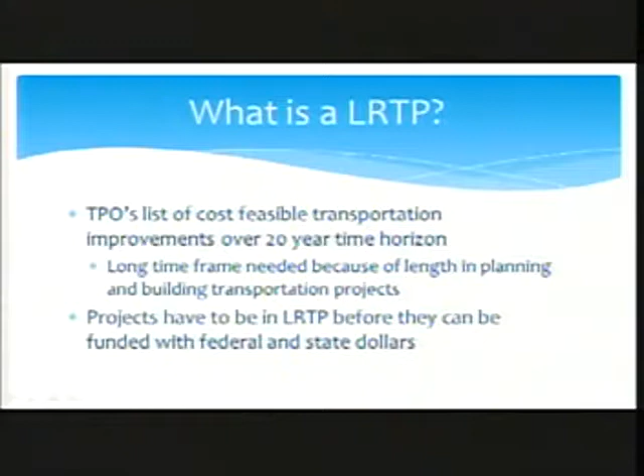Our long-range transportation plan is our TPO's cost-feasible projects out to 20 years in the future. All of the projects have to be included in the long-range transportation plan in order to receive any federal or state funding in the future. So all the projects you heard about earlier, they all had to be started and included in this plan at least 20 years ago for most of them. So it's been a long time in the process. And due to a variety of changing factors, we have to update this plan every 5 years.

We don't have a crystal ball and things change as the economy changes. So each update we have to take a look at land use plans, population forecasts, update those, look at revenue forecasts. We all know that cars are more fuel efficient and that the gas tax isn't really getting us as far as it used to. Actually at our TAC meeting on Monday, they sparked some good discussion about maybe exploring some ideas about new revenue sources as part of this long-range plan update. So that's something we're going to keep in mind moving forward.

Another thing that we take a look at is any new needs that have come up. We look at everybody's existing transportation plans. We meet with all of your local staff to see what's in your comprehensive plans, and all of the modal agencies, what's in their master plans at the port and the airport, just to make sure we're all on the same page and we know what everyone's looking to do in the future. Another fun thing that we get to address in this update is performance measures that are required by the FAST Act and MAP 21. We have to make sure all of those are addressed, and we have to make sure our long-range plan is adopted in October of 2020.

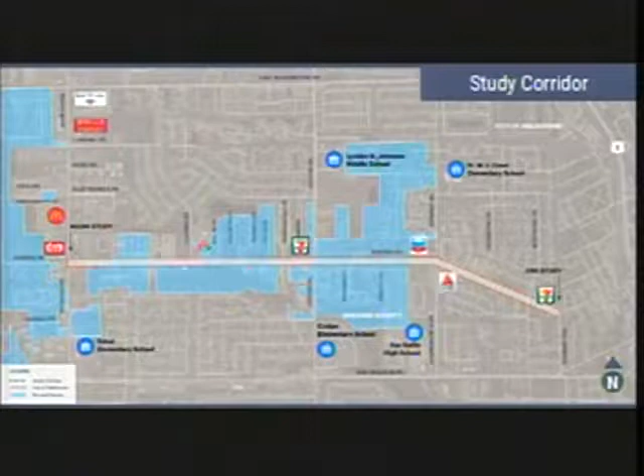So what I'll do is go through these initial slides pretty quickly, get towards the meat, which is at the end of the presentation. Purpose of the study: first phase in the transportation development process, we're really trying to address safety, operational, and transit issues along Aurora Road. We are down in Melbourne. Part of this is also Brevard County, from Wickham Road east to Stewart Avenue, which is one signal past Stewart Road / Commodore Boulevard.

So not to get those confused, we're going one signal past that to the east. Highlight of public involvement: we had a project advisory team - TPO, FDOT, Brevard County, City of Melbourne, and Space Coast Area Transit - a pretty comprehensive group. We held 3 public meetings, 120 total attendees. We also got some hits on our project website as well. People responded to comments about the project.

We had 2 unique aspects of our public meetings. We had a 'create your own typical section' station during our second public meeting, which actually got people to look at the roadway typical section and say, I have 63 feet of right-of-way, what can I fit in there? And they were able to see that if you add travel lanes or take away different elements of what's out there today and add some bike lanes, how that affects the right-of-way within the typical section.

We also had a 3D roadway alternatives section where we were able to put on virtual reality glasses and see, okay, if you were standing out there with the improvements that we had, here's what it would look like. So we have some of those 3D graphics here at the end as well.

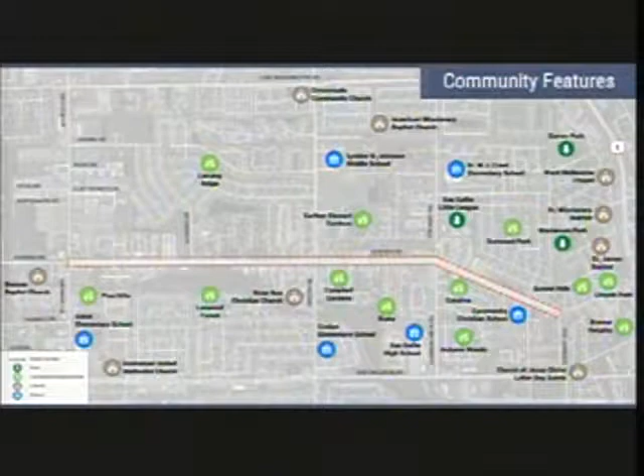Highlight of existing conditions, a bunch of community features. So you got a lot of neighborhoods, a lot of residential, 5 different public schools, and then a private school along the corridor, so that'll play a factor in the ped bike traffic that we were seeing. With that being said, we were lacking pedestrian facilities, and we have no bicycle facilities out there today. We have a 4-lane undivided roadway, edge of pavement to edge of pavement, and then we are missing areas of sidewalk.

So anywhere where you see blue, that's where sidewalk is. Where you do not have it, that's a large majority of the north side. What you'll see is that picture of that drainage ditch. You have a lot of those ditches on the north side, which is the reason why you do not have sidewalks on that north side.

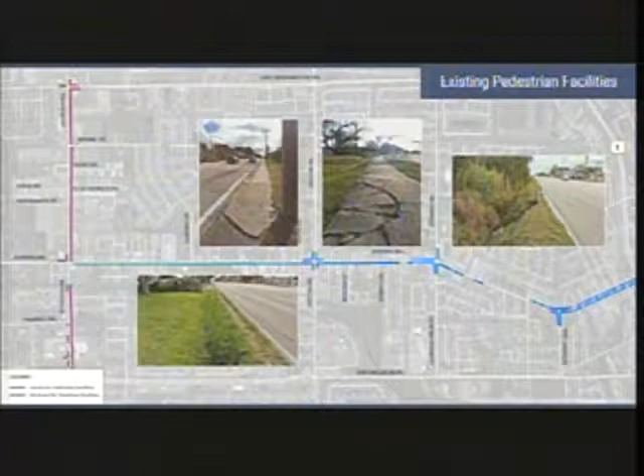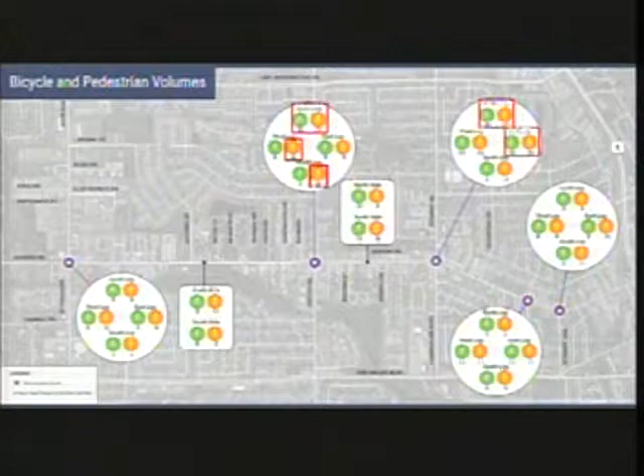A little bit on the ped bike count. We went out and did ped bike counts along the corridor. This is the peak 4 hours in the afternoon. What we wanted to highlight is Croton and Commodore. You'll see that you have those really high volumes, east, west, north, south. Those are a lot of the school kids, either the high school or the elementary and middle schools, walking along or crossing Aurora. So it's a big deal along this corridor.

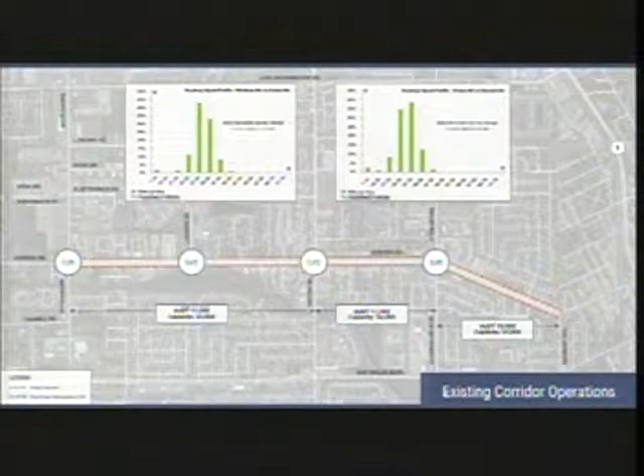High-level operations, our capacity - the biggest numbers you want to see here are that AADT, the traffic along the roadway today, is about 10,000 to 11,000 vehicles a day. Our capacity is somewhere in the mid to upper 30,000s. So what we're seeing is we're about a third to a quarter of the capacity for the 4-lane roadway that we have out there today. The graphs above just show that our average travel speed is within the range, kind of that 35 to 45 mile an hour range. Not a lot of speeding issues that we saw out there.

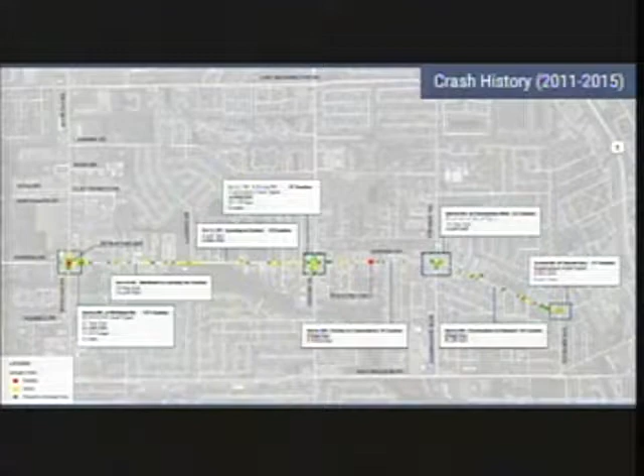Also looked at crashes. What you'll see is the clusters of crashes happen around the intersections, the signalized intersections. I think we had almost 140 at Wickham Road - that was our high crash location. We had about 50 at Croton, and then around 25 at Commodore and Stewart. We did have a bicycle fatal crash between Croton and Commodore. What we did see was that of our ped and bike crashes, a large majority were bicycle.

You can correlate that, if you want, to the fact that there are no bike lanes out there. So either the bikes are riding on the sidewalk where vehicles aren't expecting them to be, or they're riding in the road, or they're trying to cross the road. So there's quite a few issues out there with the lack of pedestrian and bicycle facilities.

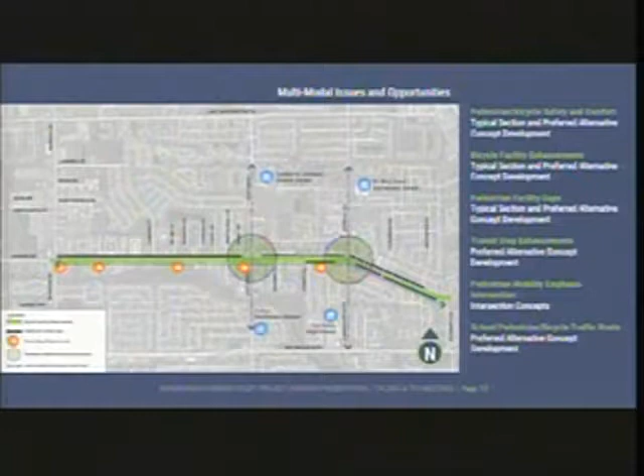Leading me into the issues and opportunities. We broke this down into multimodal - that's ped, bike, transit - and then vehicular and drainage, which I'll talk about in a second. The main multimodal issue was the pedestrian and bicycle level of safety and comfort. We wanted to facilitate those bicycle needs by trying to add bike facilities, add that sidewalk on the north side where we were missing it, and enhance that sidewalk on the south side while also enhancing transit stops along the corridor.

On the vehicular side, all those little blue water dots that you see are all the locations where we had pretty significant drainage swales on that north side, which directly correlates to where that sidewalk is not constructed on the north side as well. So those are some of the issues we were having. We also had some high crash, left turn crash emphasis areas, and we wanted to highlight the intersections for those angle and left turn crashes.

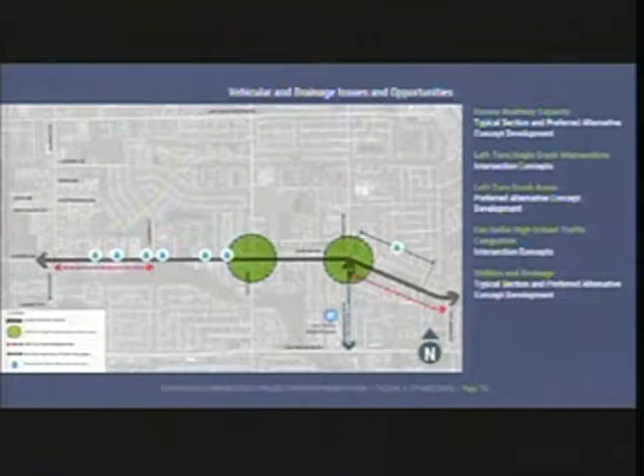So future conditions analysis. Before we got in and started exploring ways to make this a more complete streets friendly corridor, we wanted to take a look at future no build. So this is if you kept the lanes out there today, the 4-lane roadway, kept all the intersections the same - what you're seeing is that AADT and that capacity are still relatively low. I think we were looking at about a 0.5% growth rate along the corridor just because it's largely built out. This whole entire area is largely built out, so we're not going to see a whole lot of traffic growth in the future. And the levels of service were all C or B at the intersections as well, which is good.

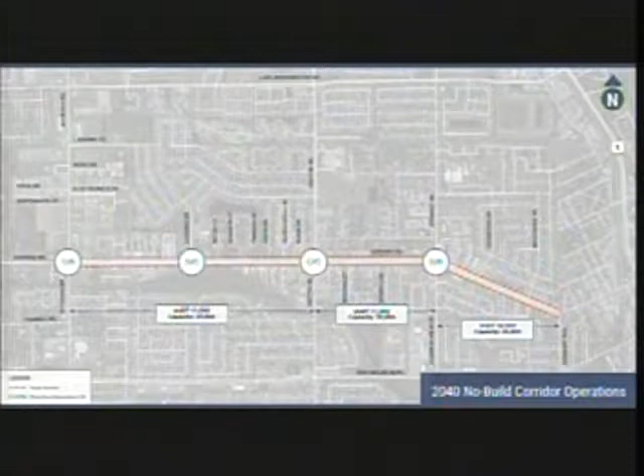In terms of the future build alternatives, at a high level, we were trying to create a complete street along Aurora Road. Everybody knows what a complete street is. It enhances all the multimodal features, allowing adequate ped and bike facilities, and transit users, while also accommodating vehicles, maintaining a balance between all those modes.

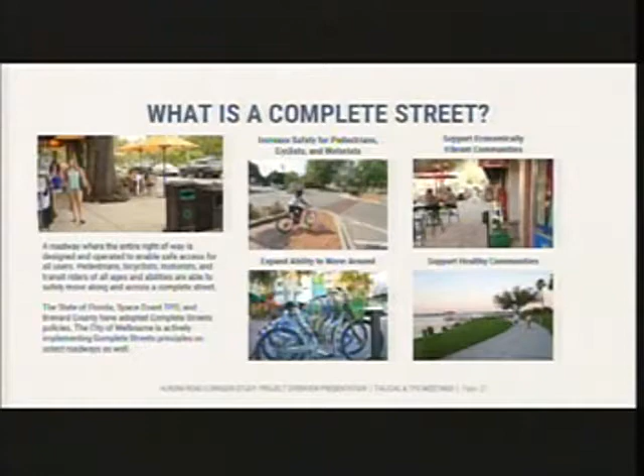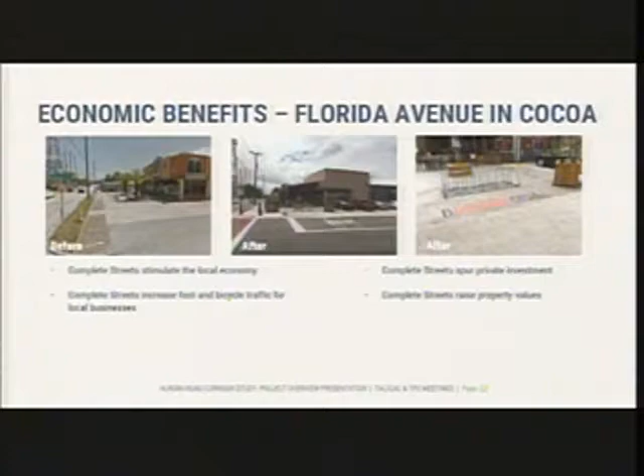We see some of the economic benefits of complete streets. This was a project recently completed along Florida Avenue in Cocoa. Before, we had a couple of businesses there that were then redeveloped, either because of the Complete Streets project or shortly after it.

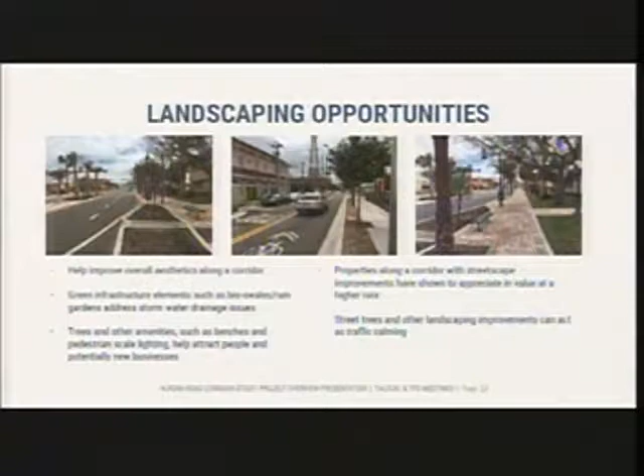We also have landscaping opportunities as well. Landscaping wasn't as ideal here, it wasn't something that was really discussed much. Some residents said they didn't really want the landscaping, and that was fine. We're not necessarily recommending this, but it's a kind of byproduct of the complete streets methodology as well.

One of the ways you can do a complete streets project and facilitate those modes, which we explored along Aurora Road, is a lane elimination, or a road diet, as we like to call it. Lane elimination has a pretty bad connotation - when you tell people you're going to take away their lanes, you tend to get a negative reaction. So we like to call it a road diet, but essentially they're the same thing.

The most common type is going from a 4-lane undivided section, which is what we have along Aurora Road, to a 3-lane divided section. You'll see those graphics in the lower left: you have the 4-lane undivided, and you go to the 3-lane with a center two-way left turn lane.

For safety, we ran a Highway Safety Manual analysis on this corridor, so these are real numbers for Aurora Road. We'd see a crash reduction of about 20 to 30% on the corridor, which equates to about $5 to $7.5 million saved over a 20-year life cycle of the project. Keep that in mind as we start talking about project costs.

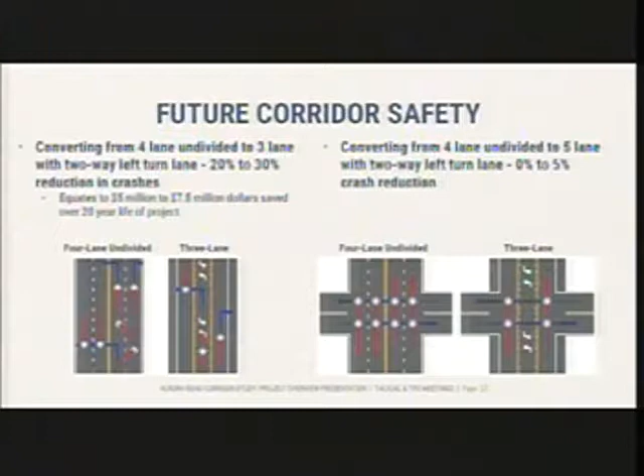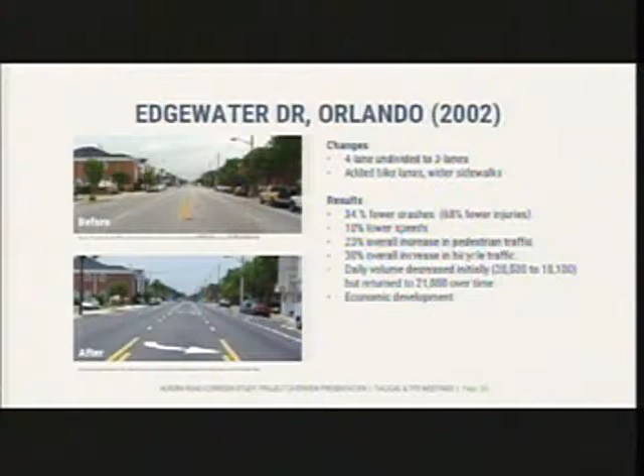A case study we looked at, there are a couple more outlined in the report, but this one was pretty applicable: Edgewater Drive in Orlando, for those familiar with it. We had about 34% fewer crashes, 10% lower speeds, an increase in ped bike activity, and traffic volume, which I wanted to point out, is about double what it is along Aurora Road. I drive this corridor pretty often, I work in Orlando, my bank is along this corridor, and it works well from a 3-lane perspective. You also get that increased economic benefit as well.

Here's a graphic to show how this works. Today along Aurora Road, if you come up to, say, Lansing Street, you have the situation above where the yellow cars are coming up to the intersection along Aurora trying to make a left to go north onto Lansing Street. You also have the gray vehicles that may get caught in that inside lane and have to swerve over, maybe cut somebody off, causing a collision to get out of the way, either so they don't rear-end somebody or because they want to get around them.

What you see is that if you go to a 3-lane typical section at that location, you can actually develop a left turn lane there. Just think of Aurora with one travel lane in each direction, and an exclusive left turn lane from Aurora Road to go northbound onto Lansing Street.

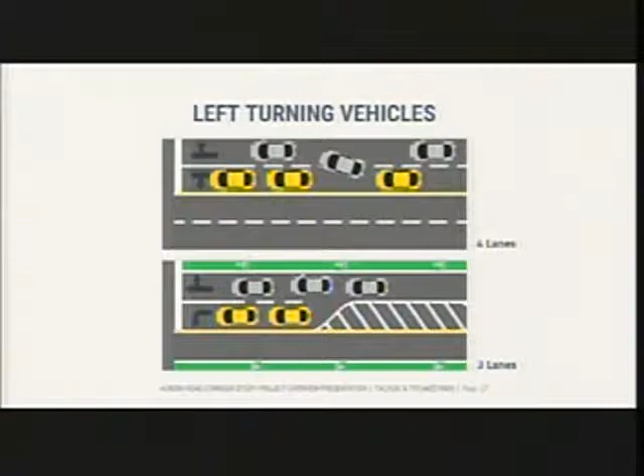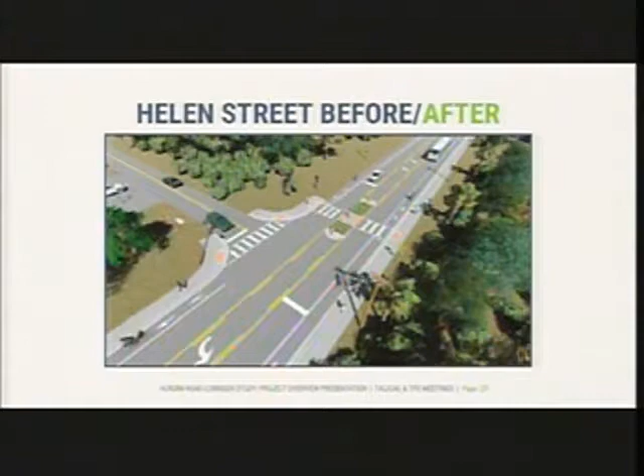What I did want to show is Helen Street. This was one of our 3D typical sections that we did, and this ties with a bus stop that's right where that mid-block crossing is.

You could see that if you go from the 4-lane undivided, you add those sidewalks on the north side, you connect down to the bus stop, wider sidewalk, and those bicycle lanes as well. So then a little bit on Commodore as well. The before and after, 4 lanes along Aurora, you could come through and do the bicycle lanes. We were able to add a right turn lane to go south on Commodore to accommodate that AM high school traffic as well. We were also seeing some queuing northbound, so we were able to add a northbound left there as well. So some pretty significant changes to the Commodore intersection, but you're able to make it work with that road diet concept as well.

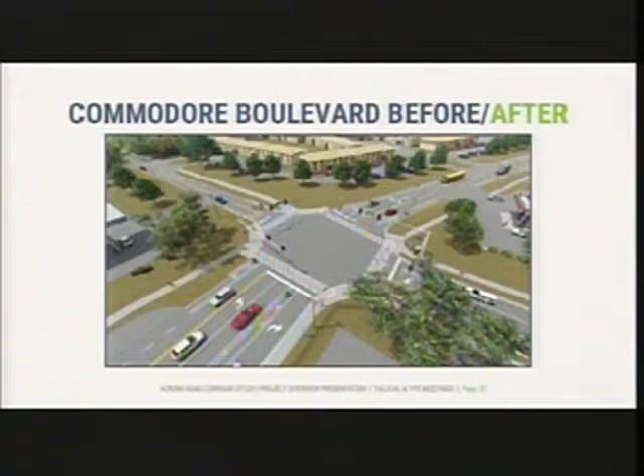So a little bit on the roadway improvements. I'll go through these pretty quick to get to the matrix, but we looked at 6 different options overall. The first 2 dealt with adding a center 2-way left turn lane to the 4-lane section that's out there today. As you would expect, it incurs quite a bit more right-of-way if you're trying to do that type of improvement. This came out from our first public meeting where we had folks come out and say, we don't want you to do a road diet, we want you to put in a center 2-way left turn lane. So we went through and explored that concept to see what the impacts would be.

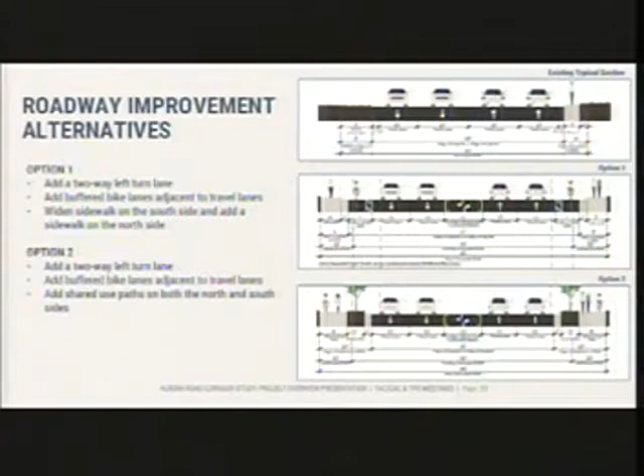Options 3 and 4 are your more short-term alternatives. We were looking at essentially resurfacing the roadway, doing that road diet concept for options 3 and 4, putting in the center 2-way left turn lane, 1 travel lane each direction. You're able to have bike facilities and then improve the sidewalks as well. Then 5 and 6 is more of the same, just positioning your ped and bike facilities in different places along the roadway. Option 5's distinct difference is that we're able to maintain those swales on the north side of the road, and you put the shared use path on the back side near the right-of-way line.

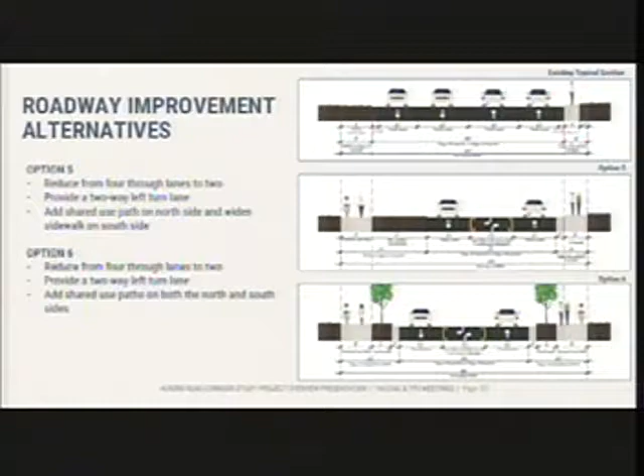So what does this all mean? We went through and did our qualitative assessment. This really isn't putting numbers to anything, it's just more high-level impacts. What we saw is that generally all the alternatives improved ped or bike safety in some way. Even the 5-lane alternatives, you would go through and add bike facilities and sidewalks to that, so you would see an improvement in bicycle mobility and safety. What we did see is that as you went down to the road diet, you would see that adverse effect slightly in the vehicular mobility, so you are taking away a travel lane in each direction. We recognize that there would be a slight impact to operations at that point.

But when you get into the overall cost of the improvements, you see at that 5-lane alternative, if you kept the 4 lanes out there and added the center 2-way left turn lane, it's by far and above the most cost from a right-of-way, drainage, utility, and overall cost perspective. So the 3-lane options were looking pretty good.

So what we ended up coming out with was a long-term vision to do a road diet along this corridor. What essentially happened was between the second and third public meetings, we took a 3-lane concept to the second public meeting and there was support for it. We had about 90% of people say, hey, we like this concept, we want to see it move forward. We came to our third public meeting, fleshed that concept out a little bit more, and we had about 90% of the people say that they did not want a road diet concept. So it was a very stark difference between the second and third public meetings.

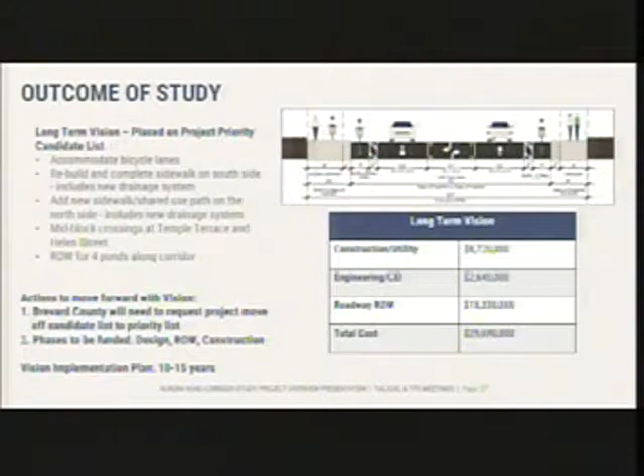So what ended up happening is the county is going to move forward with a resurfacing project. They're going to resurface it as the 4-lane road that's out there today. What we did want to propose is a long-term vision for the corridor, which is slightly more money, in the $30 million range, and a large majority of that is because of the improvements we'd be making to that north side. We'd be adding that shared use path, filling in the drainage ditch, piping it for lack of a better term, and then you would have to buy off-site ponds, which is where that $18 million in right-of-way comes from. So we're not acquiring property along the corridor, we're acquiring pond locations potentially to treat all that water.

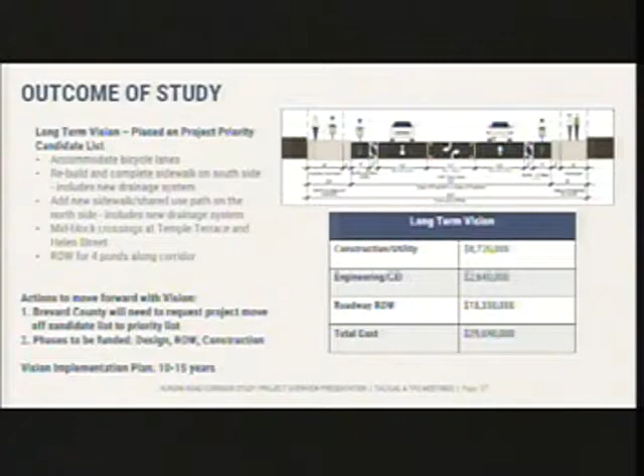So the action items on this vision: Brevard County will need to request the project move off the candidate list and onto the priority list. We still have design, right-of-way, and construction phases that need to be funded. We're looking at about 10 to 15 years to implement the long-term vision.

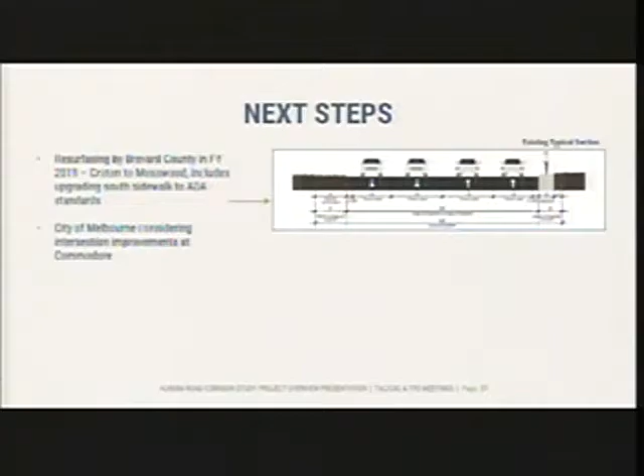As mentioned on the next steps, Brevard County is going to resurface the roadway from Croton to Mosswood, including south side sidewalk ADA upgrades. The City of Melbourne is also considering intersection improvements at Commodore. We also looked at some short-term improvements, including the resurfacing, emphasizing the intersections, and putting special emphasis crosswalk markings when doing that resurfacing project.

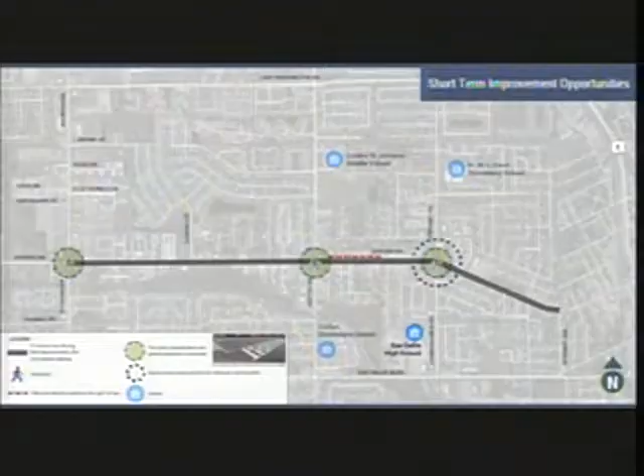A few projects came out of the Wickham Road operational analysis that tie into the Aurora Road project. At the intersection of Wickham Road and Aurora, we're looking at doing a short-term project, about $200,000, to add curb ramps on all four corners, upgrade our crosswalk markings, and connect back to the bus stops.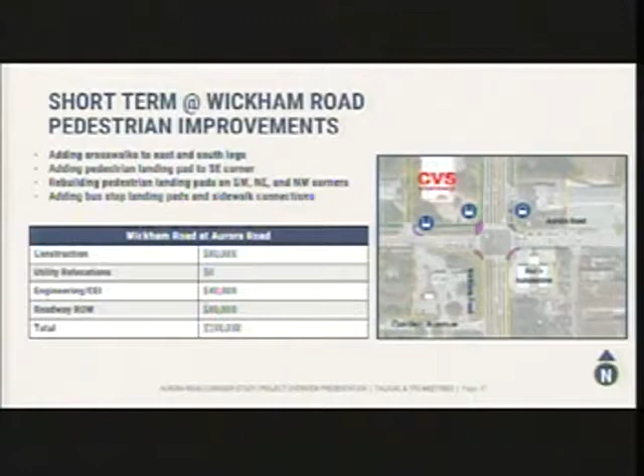Midterm improvements at the same intersection would look at a couple of turn lane improvements, adding a westbound right and a northbound right, cleaning up that intersection and allowing for better capacity there as well.

Moving slightly north of the Aurora Road intersection on Wickham, this would look at access management improvements to the Northgate Plaza, adding a median there. That was one of our high crash locations from the Wickham project, so cleaning up that area and moving the signal from the Northgate Plaza up to Northgate Street, where the McDonald's and the Krispy Kreme are.

I don't know how long I went, but hopefully that went through relatively quickly. So I'd be up for any questions. Okay, no problem. Any questions?

Mr. Smith: At Wickham, you say you're going to do some curb ramps, is that what you called it? Yep. But there's no sidewalks that go to those curb ramps, is that correct? Along Aurora, west of the intersection, on the south side, no. Wickham, west side, going northbound, no. So the southwest corner would not have sidewalks approaching it. The other three corners do have sidewalks. Right. Well, that's been a complaint that I've heard.

This is my district, and that's one of the complaints I hear. So what you're saying is you're not looking to make this a 3-lane road for another 30 years? Aurora Road, right. I don't know if I'd say 30. It'd be whenever the funding becomes available. Well, I just want to tell you that the little kids in the Boys and Girls Club there, and the other kids who walk to school, you're going to make them and their families very unhappy. Because every time I speak to any of them, the first question is, when are we going to get sidewalks, so our friends can come play with us at night at the playgrounds or the Boys and Girls Club? Without sidewalks, their parents won't let them walk along Aurora Road.

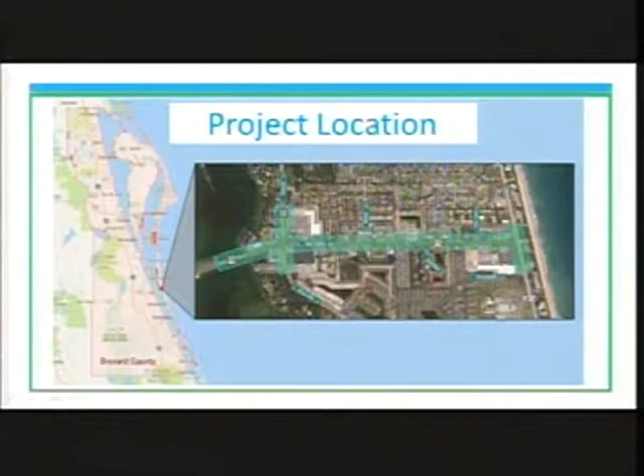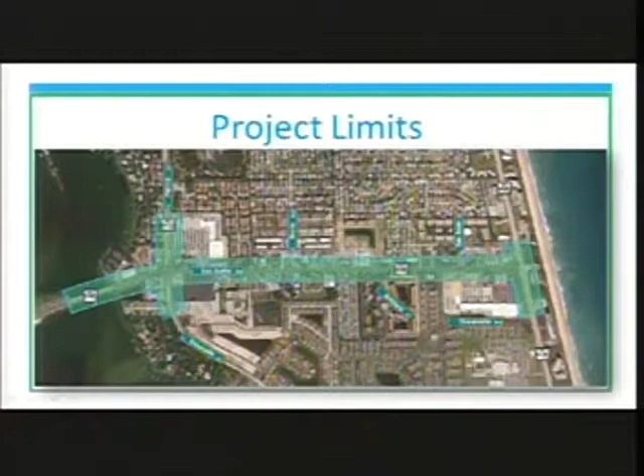So moving along, project location you can see on the map. It's a tiny little area there in the Atlantic Beach, in Melbourne and Brevard, and more closely what the project limits are. We're a smidgen to the west there on 518 going across to the causeway, and a little bit north and south on South Patrick, and then going over to A1A, again just a little bit north and a little bit further south on A1A.

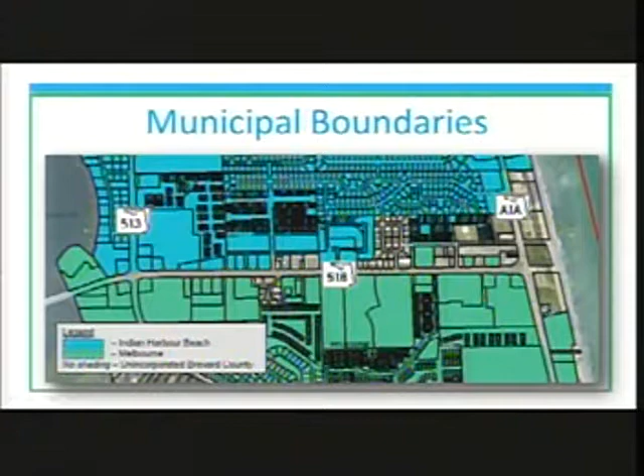This shows you our boundaries of the municipalities that were involved in this study. As I said, Indian Harbour Beach to the north, Melbourne to the south, and then the unincorporated Brevard County in the grayish area.

So, cutting through all of that, in the beginning we did a planning phase, which was completed in March of 2016. Out of that study came 3 priority groups: bike lanes, sidewalks, and the A1A intersection being the first; the relief bridge, access management, and the State Road 513 intersection being the second; and the third was roundabouts and a median there at, is it Barnes & Noble?

Oh, well, we skipped it. It escapes us now.

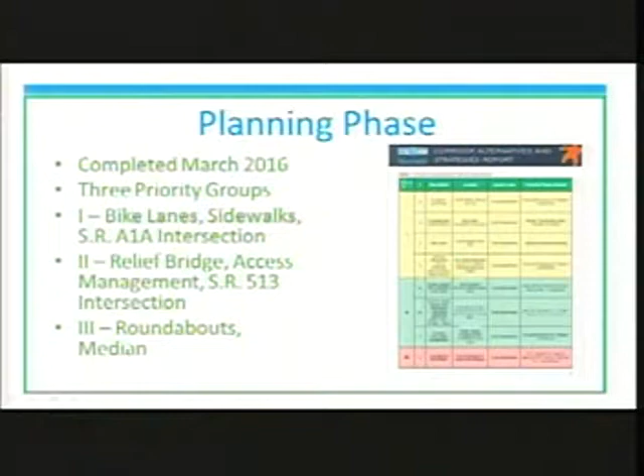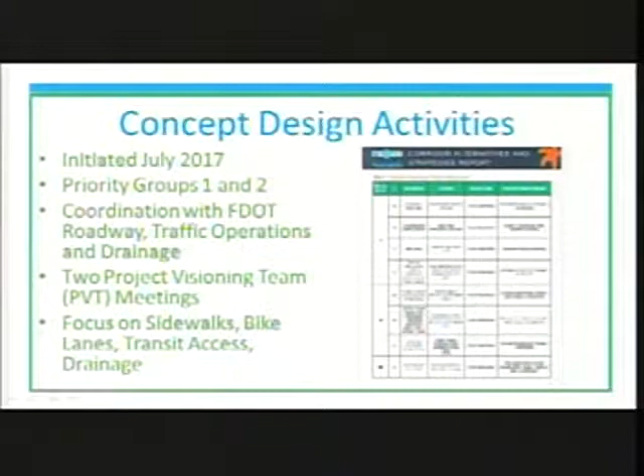Moving along, in the concept design activities, 2 of those groups moved forward, being the sidewalks and bike lanes, transit access, and drainage came up as a very important item to evaluate.

Our project visioning team, which we call those stakeholders more closely and intimately engaged in this project, are listed here: the DOT, of course, Space Coast TPO, the municipalities Indian Harbour Beach and Melbourne, Brevard County School Board, Space Coast Area Transit, very engaged, and the Space Coast Office of Tourism, and 2 advocacy groups, as well as very high-level business owners who were engaged.

So the PVT meetings, we had 2 of those. Their involvement gives us a more intimate focus—they're out there, they use the corridor, they work on the corridor, they live on the corridor, so they provide us a perspective we're not going to have. We come from DeLand, spend a couple hours and go. You live here, so you know what's going on. So we really depend upon that input from our PVT.

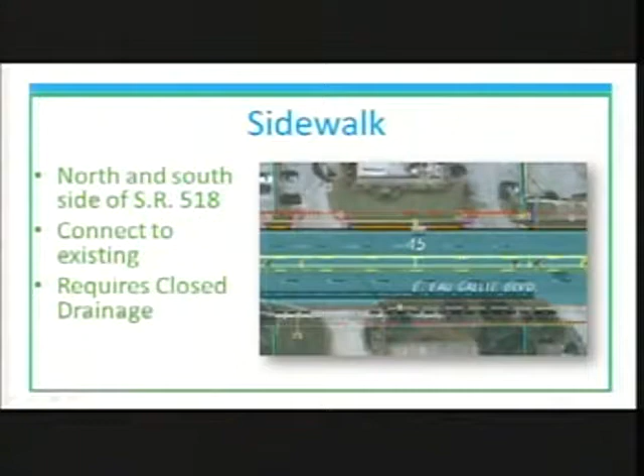While we were in our PVT meetings and while we were looking at this, we realized that there are pedestrians out there, and there's no real good way for them to cross the street except at the signals over at South Patrick and at A1A. So we wanted to investigate areas where we may be able to provide mid-block crossings, and we found 2 locations, one to the east of Burns and another further east at an existing transit stop.

Now, why this is challenging on this particular project is it's a 5-lane section out there. When we have a mid-block crossing, you want a raised pedestrian refuge, similar to what's going on A1A. And there's so much free access from properties. By raising the median, it really restricts some of the access to and from the properties. But we did find 2 good locations.

The one to the east of Burns is approximately midway between the 2 signals, which is great, and it's also the main access to the residential community to the north. And at the east side, that's at an existing transit stop, and that will allow for people that need to cross the street safely to do so at that transit stop.

We also propose a higher visibility section with rectangular rapid flashing beacons, or RRFBs. You've seen these on A1A as well. This will really alert the motorists out there that people are crossing, because you need to yield and stop for pedestrians in intersections.

Mayor, we have 3. That's a correction, we have 3. You said 2. Well, we're proposing 2. But you'd mentioned it, at this time there are only 2. There is a 3rd at the Winn-Dixie, there's a stoplight right there. There is a stoplight, but there's no crosswalk there. Oh, but you're right, there's 3 signals. There's no crosswalk at the light at Winn-Dixie. San Juan across is not part of that signal, so there are no pedestrian signals or pedestrian crossings there currently. Now, we do propose to add crosswalks at that location. So you're correct, but that'll be at a signal, and not like the mid-block crossings with the flashing RRFBs. So yes, there's a 3rd opportunity for pedestrians as part of this.

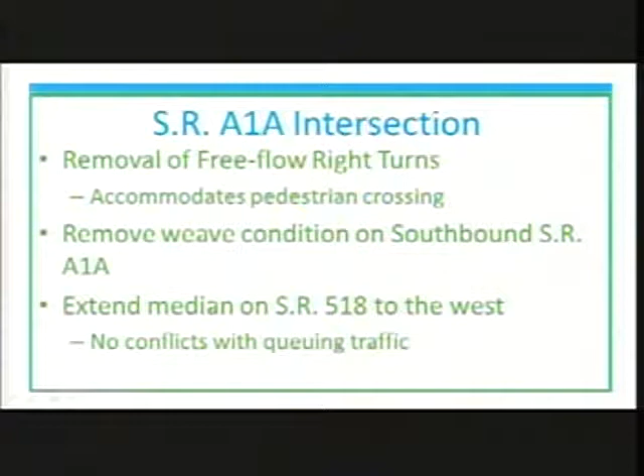In addition, we propose to extend the median on 518 to the west, not all the way to the intersection but part of the way, right before San Juan. That was also part of the planning study, and there won't be any conflicts with queuing traffic. We ran some numbers, and here's a picture of it.

You can see the free flows are gone - all of the right turn lanes are brought to the signal. Where you see the green areas, that returns to nature, so to speak - that's grass now. On the south side, where there's no more weave condition to the Walmart, it actually develops a right turn lane southbound into Walmart. This provides an opportunity for pedestrians to cross both north and south of that intersection and get to the beach without having to cross free-flowing traffic.

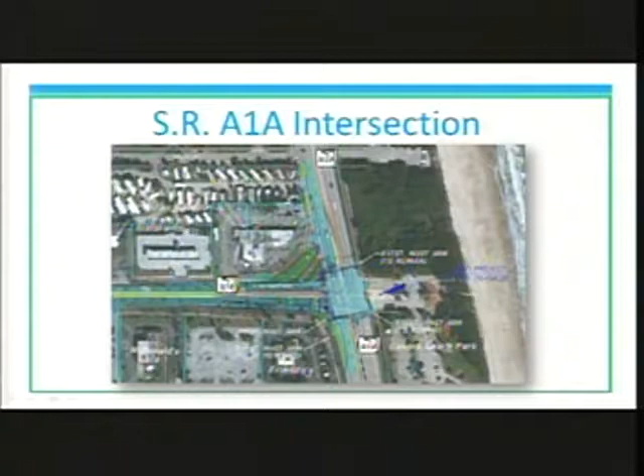As part of this, there are two SCAT lines along 518, and you can see the bus stops there. There's no access from the existing sidewalks on the south side, and no sidewalks on the north side. In some instances, the stop signs are right near a swale. So we reviewed the layout and want to relocate a couple of these stops - very minor, 50 to 100 feet one way or the other. We got with SCAT, and they're good with it.

We also want to provide boarding and alighting pads, which are a minimum 5x8 concrete pad with access to the sidewalks at each of these stops, just to make it safer for transit users.

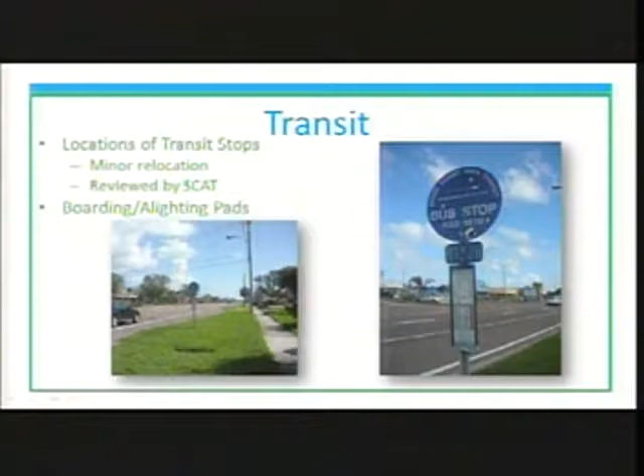In addition, I didn't talk about bike lanes. There's a 5-foot shoulder out there that acts as an undesignated bike lane, but there are many, many right turn lanes out here, as you can see in that aerial photograph. There are no keyhole lanes - I don't know if you're familiar with those, but that's the 5-foot bike lane between a right turn lane and the through lane.

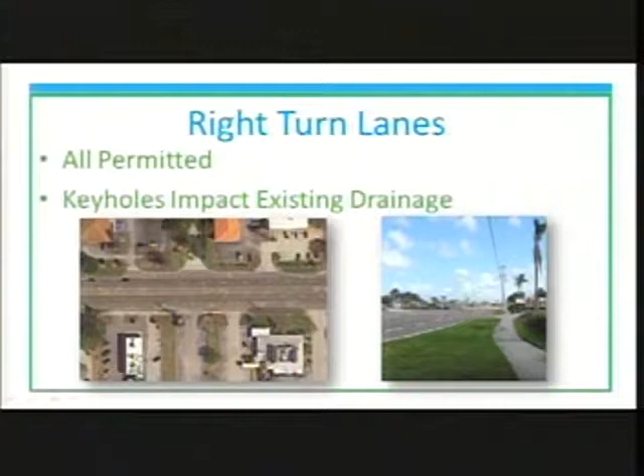We would want to provide these as a continuation on those shoulders. To do that requires 5 feet of roadway widening, which again impacts the drainage because it's such a narrow corridor - we won't be able to use swales in that case anymore. You can see in that photograph we'd have to bring everything out 5 feet. So in those instances, we would also have to close the swales, pipe them, and add a closed drainage system.

Since we've been hinting at drainage, let's talk about it. The existing system is ditches and storm sewers - storm sewers primarily on the south side, ditches on the north side. Most of it, except for the far eastern end, is conveyed to the large pond on the river to the west of South Patrick on the south side of 518. The planning study didn't really get into the details of the drainage concept.

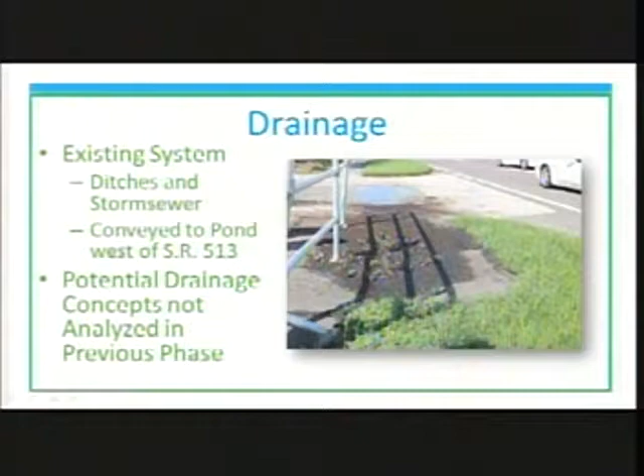That's why we wanted to focus on it here before this moves into final design.

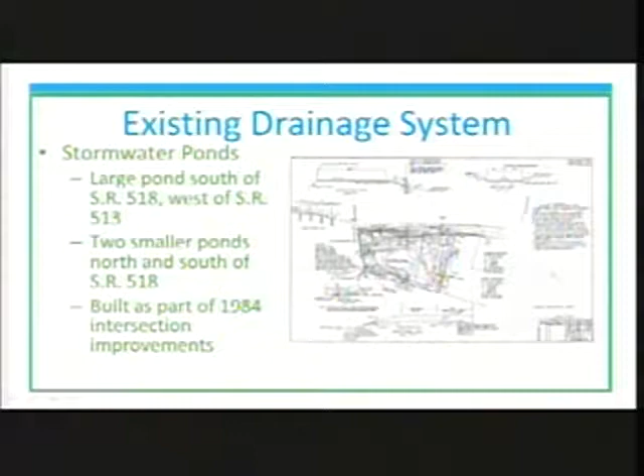So the existing system, everything drains to these stormwater ponds. That's a diagram of the larger pond on the south side of the road. It was built in 1984 as part of the South Patrick intersection improvements. There are also two smaller ponds on South Patrick, north and south of 518, that take care of some of that intersection traffic, or the intersection drainage.

So right now it's working, but we're adding additional impervious areas with the sidewalk to the north, any right turn lanes where we add these bicycle keyholes, and it reduces or just flat out eliminates the drainage swales that are there. So that's where we would have to close the drainage.

Could I ask a question on that? Yeah, sure, Ms. Young, thank you very much. With this more pavement that you're adding, and you're closing the system, what size pipes are you planning to use in there? Because that's an issue now. The water can't, when it runs off, it can't get off fast enough.

Exactly, and I touch on it in a couple slides, but you're 100% correct. We have to rework the existing system that's out there and add new pipes. But with the underground fiber or cables or underground sewer and water that's already there, I know in where I am, it's very difficult to change that. Once you open it, you open up a whole can of worms under there.

It's a big impact. There's utilities everywhere out there. It drives up the cost of the project. And I have some preliminary cost numbers. For a job like this, the design and construction numbers are about twice that what you would expect for that reason. That's what makes these sidewalk jobs sometimes very difficult, because the drainage systems have to be reworked.

And you see this everywhere. There's another, I think you might hear a little bit about this on the next presentation too. These are old roads. They were built with swales when everything wasn't as developed, and now as we grow and realize that we want to accommodate bicycles, we want to accommodate pedestrians, which we should be doing, there are other impacts that we have to chase.

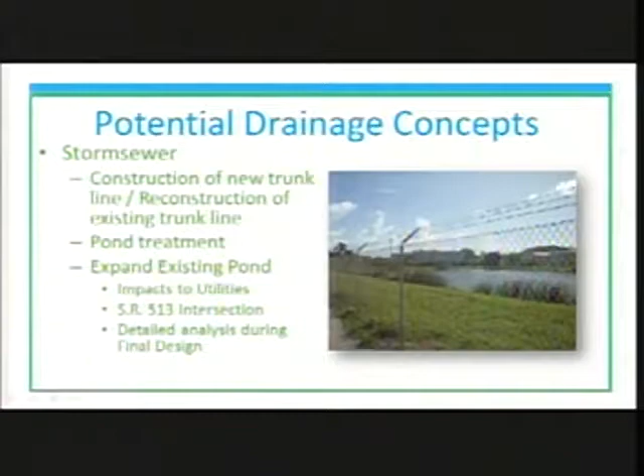So it would have to be reworked. We think it can be reworked to work properly, but that's another thing that will have to be scoped in final design, to take a close hard look at this, because ponds, as you saw in the last presentation, are very expensive. Well, I don't want anything more going into the lagoon. Right, and there are special protections on the lagoon as well. We wouldn't connect right to this pond and send everything in there. They would have to do some rework and bring it up to current standards. But we think it could work, so that's a start.

One thing I did want to touch on was the Indian River Relief Bridge. This was identified in the planning study. Unfortunately, there were some fatalities on this bridge on the north side several years back. The existing condition of the bridge is there is a barrier-separated pedestrian facility on the south side. The north side is signed, no fishing. There is no sidewalk leading to the north side. That doesn't keep people from the north side.

But there is a safe way to cross at South Patrick to get on the south side and go to the park. It's very important to everybody, and especially the folks of Indian Harbour Beach, that we have safe pedestrian accommodations. We coordinate with the different departments in DOT, and at the moment, as part of this project, to just barrier separate something on the north side still isn't particularly safe because it doesn't lead to anything. However, through the project visioning team meetings, a separate trail project that would include accommodations on this bridge has been applied to be placed on the trail priority list. That would kind of complete a loop around the causeway, because right now it's only on the south side.

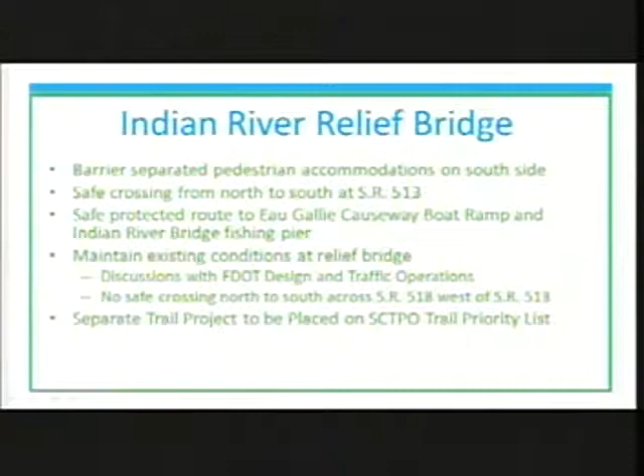I touched on this a little earlier. The estimated project costs, we just did some rough estimates right now. The design would be around $500,000. Construction, a little over $5 million. It's a 1-mile project, more than you would expect for a simple resurfacing. And again, that is because of the drainage work and the utility work as well. Now, that $5.3 million includes maintenance of traffic, mobilization, and 10% contingencies.

I like to throw a lot more contingencies at this phase. I like to put 25% contingencies, but our program doesn't let us go that high. But I would not be surprised if construction was higher than the $5.3 million out there. South Patrick intersection, there are utilities under that road going every direction, and there's a lot of them.

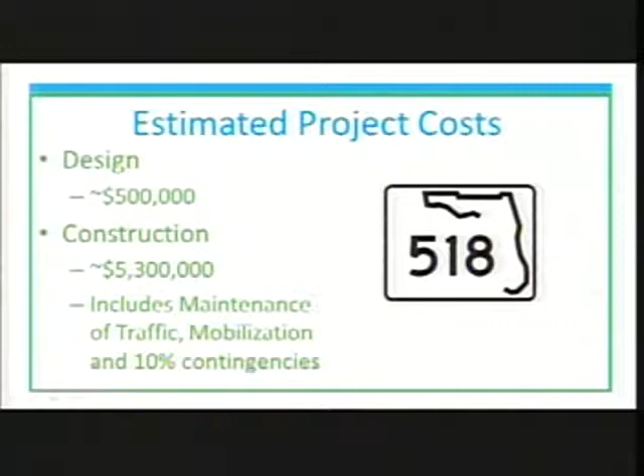So our next steps, like Judy mentioned, we have a public meeting on August 30th. Your agenda packet says the 1st, but we had to move that back, so it is August 30th, a Thursday, at Indian Harbour Beach City Hall. Based on the results of that meeting, we'll do our final refinement of the alternatives, document this all in a feasibility technical memorandum, and then the next phase would go directly into final design, which at this time is not funded.

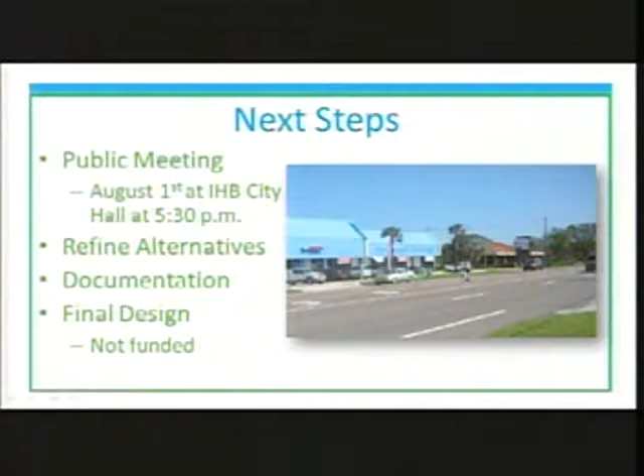And if you have any other questions, we would be happy to take them, or if you need to get in touch with us at a later date, here is our contact information. Thank you, Chris and Judy.

Any questions? All right, Georgiana.

Judy, I cannot remember, did we look to see if this was on the resurfacing list, if something was going to be coming up in the near future? I don't believe this one was. Because anytime we can get an opportunity to get these type of improvements incorporated into a resurfacing, it's a bigger bang for the buck. The Fiske project that is coming up is going to have a few projects incorporated into that resurfacing, but we'll have to keep our eye on that when it shows up in the work program.

Yeah, as you pointed out, that's something that we really do watch for, to see if there's what we like to refer to as the low-hanging fruit. If there's something we can snag and throw into resurfacing, we'll do that. Unfortunately, there was nothing in the short term that's coming up.

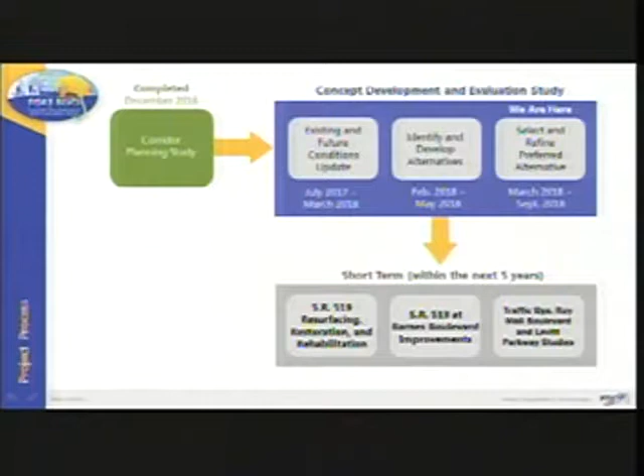This was originally a planning study, again, as the previous State Road 518. We do a planning study first to sort of hone out what is there, or should this go into a PD&E? And sometimes when we go into the concept development, we discover, yes, it probably should have some PD&E aspects to it. So from the corridor planning study, which was completed in December of 2016, we came up with existing and future conditions and developed some alternatives and refined those alternatives. In the concept development, we further defined those alternatives, first going back and reviewing, again, the existing and future conditions. Things change after a year or so, so it's important to reevaluate those.

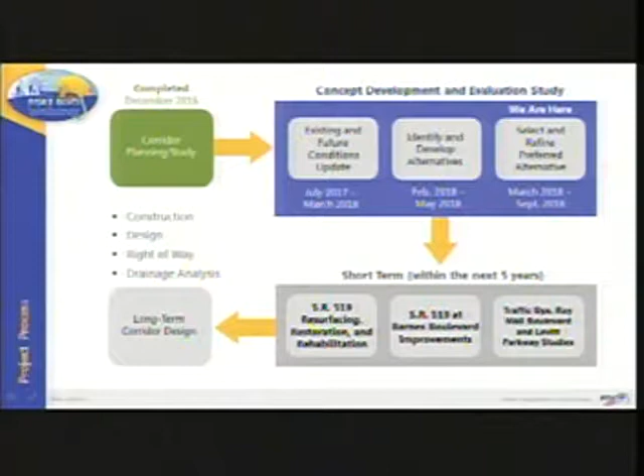So coming out of that, we have, within the next 5 years, some short-term projects. There is a resurfacing in this corridor, we refer to that as the 3R. There's also some tweaking of the State Road 519 at Barnes Boulevard, there's a misalignment of that intersection, so we'll touch on that a little bit more. Todd will, in his part of the presentation. We also have at Roy Wall Boulevard and Levitt Parkway some concerns that we're going to be addressing further with our traffic operations unit. So we'll talk about that a little bit too in Todd's part of the presentation. I want to reiterate, though, that's something we'd refer to as more the long-term improvements to a corridor versus some of the short-term that we can implement in the 3R.

So, moving along, study area limits. We're from County Road 502, or Barnes Boulevard, there at Interstate 95, northbound to State Road 520, King Street. It's a little bit over 4 miles in length. And again, as with 518, we cover multiple jurisdictions, City of Rockledge and City of Cocoa. It was originally a county road and transferred over to the department in the 1980s. That created some interesting challenges. When you had that transition, not all the records were available to us. This corridor is very transitional in character, and it is a north-south route between I-95 and State Road 520, and the connection to Viera to the south.

So, again, we had a project visioning team, a lot of the same folks, as well as, instead of the previous communities, we were looking at Cocoa and Rockledge in our group. And again, they brought with them that local knowledge that we don't necessarily have. It's much appreciated.

So the data updated for the corridor planning study, as I said before, it was existing and future conditions. We also looked at turning movement counts, the bicycle and pedestrian counts, which are very important in a corridor of this length, and signal timings, again, how is this working?

Is it safe for pedestrians to get across? Is there enough time for them to get across?

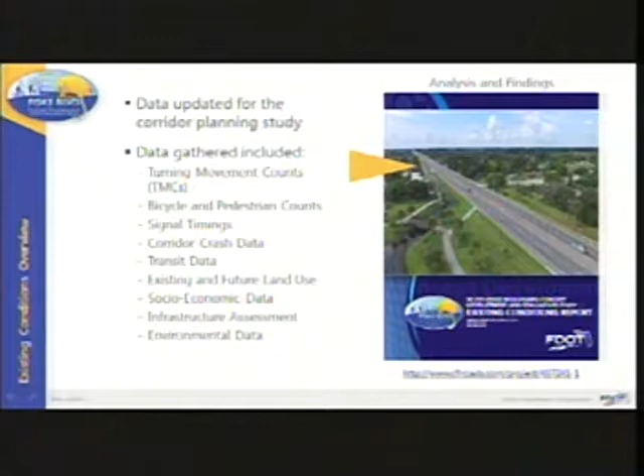Corridor crash data—is there any change from the previous information we had from the 2016 study? Transit data, again, Space Coast SCAT was very involved with it, and we appreciate their help as well in working on that. The socio and economic data, that's very important in a corridor of this nature, especially when you have such a difference between Rockledge and Cocoa, night and day. The infrastructure assessment and environmental data.

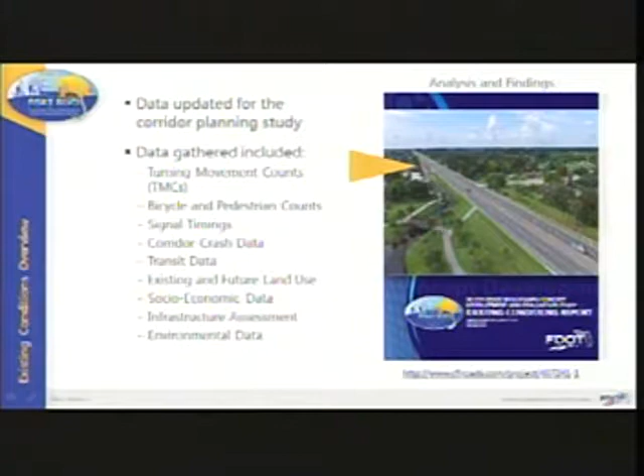When we previously did the planning study, not a lot was happening. Well, here we are 2 years later, and in the south end of 519 Fiske Boulevard, you've got subdivisions coming in, you've got a hotel coming in, so that really impacts what we knew then to what we know now. So I'm going to let Todd take over from here.

All right, thank you. Good afternoon. For the record, my name is Todd Davis. I work with VHB, consultant to DOT.

And as Judy mentioned, as you heard from Chris earlier, I kind of wanted to backtrack to the real intent of the concept development study. As Judy mentioned, the planning study is our first attempt. We use state funds to do that for the department. We move into concept development.

The intent of concept development is to really evaluate and create this technical scope to move to design. We don't want to just have design make all decisions, take one step forward, two steps back, and do that dance, if you will. We're trying to nail all that with public involvement ahead of time. So that's the intent of doing these studies and creating these estimates and knowing how much is going to design, ultimately how much is going to construction.

So it's a good understanding for how we're coming up to these studies. As part of this, as Judy mentioned, we reevaluated and recollected all the data as part of this concept development study.

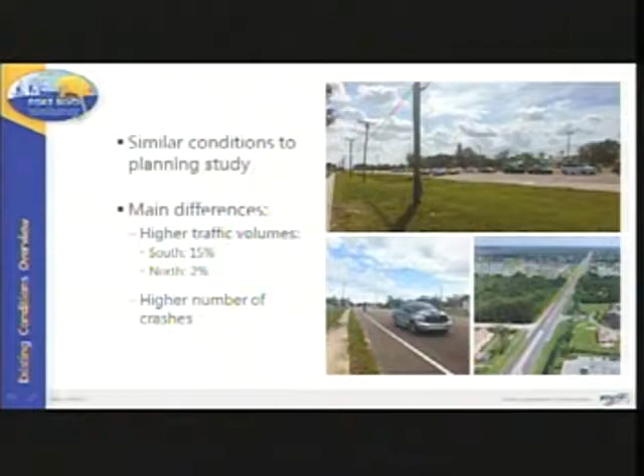One thing I do want to mention is that these traffic patterns might additionally change, maybe decrease. As you guys are well aware, the Viera interchange is going to be constructed soon. Right now it's not open. When they connect that, it might again reduce traffic because maybe more people are using that interchange rather than the Fiske Boulevard interchange. So there's a lot of questions there, but as of right now, we did see the increase after the Barnes Boulevard construction.

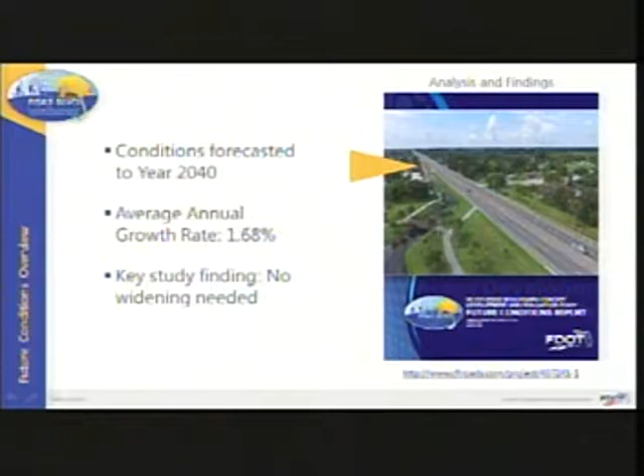Consistent with the other studies, we did do a future build-out at 2040. We used an annual growth rate of 1.68%, which is what we saw historically and what we utilized for this study. Really the biggest thing is it's consistent with the planning study—there is no widening needed. The traffic conditions, the capacity of that roadway is there. It's really a safety matter and trying to get pedestrians and vehicles in and out of that corridor.

Let me highlight the key aspects that we'll be going over in regards to how we came up with our alternatives. We're looking at level of service, the traditional grading scale, A to F, A being best, F being the worst. We look at the right-of-way, and Judy kind of highlighted on it.

It's a corridor that was transferred over to the department. It used to be a county facility back in the 80s. It was transferred over to the department as a swap with Barnes Boulevard. Surprisingly, nothing came with it—we have no plans, we don't know how the roadway is constructed, we don't know what's underground. We have no idea. The stuff Chris mentioned earlier with the drainage on Eau Gallie, we don't have that. We don't know how the underground piping is.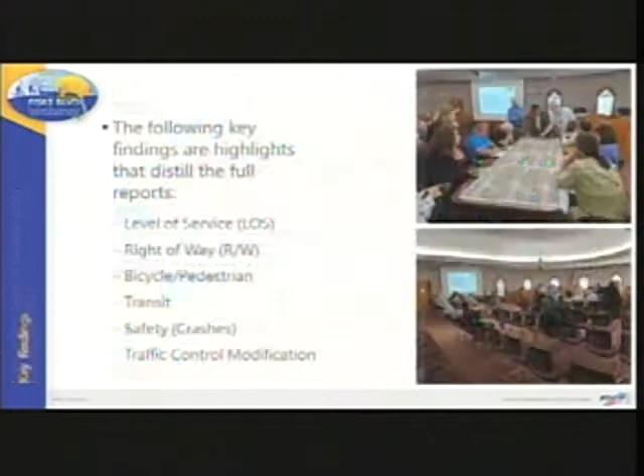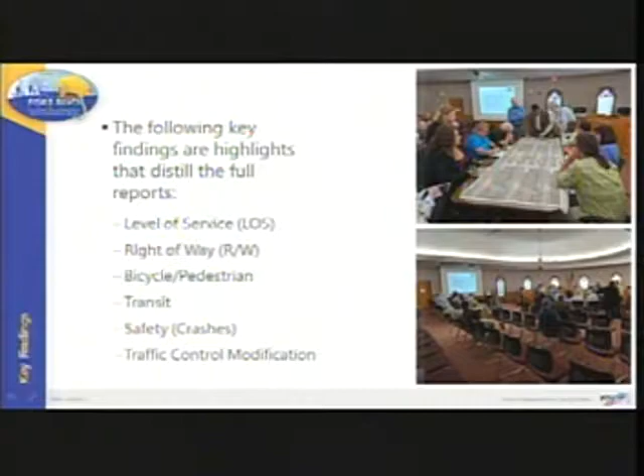All we know is we have 3 permits along this corridor, and we know it goes out to a lake, kind of along the northwest, west of Fiske. There's 1 pond, and we know 3 permits go there. The rest of the corridor, we have no idea. We just know some parts are open swale, some parts have a ditch. Underground, we have no idea how it works. So that's one of the biggest issues - we may make recommendations, but we don't know what costs are associated with it because we don't know what we need to improve or how it operates today.

The other side of that is that we know the right-of-way limits go outside that sidewalk on the outside. It's pretty wide, but the maintenance the department does is only along the roadway and the sidewalk abutting the actual edge of road. The open swales and sidewalks outside of that are currently maintained by the city and the county. So the question is, where does the state right-of-way end and where does the county's begin? That's also an unknown because, again, we have no maps.

Historically, we have a gentleman who's been the public works director for the city of Rockledge for a while. He knew the history of it, he knew the foreseen agreements, but we have no documentation saying who's maintaining what, who's doing what. It's all just working right now - I say working in quotations because when the last hurricane hit, Hurricane Irma, there were some houses flooded because of the open drain swales that rose too high into the houses. So it's a conversation going on right now, not just with this study but beyond it, with the Secretary of District 5, trying to figure out how best to look at this and get a formal agreement between all the local jurisdictions.

We also look at transit, working with SCAT, as Judy mentioned, look at safety and also the control modification. Currently looking at the existing year, this is AM on top, PM peak conditions, which is AM 7 to 9, PM 4 to 6.

Looking at the operations, the key ones I want to highlight again are Barnes Boulevard operating at level of service F, and 520 also operating near capacity at level of service E.

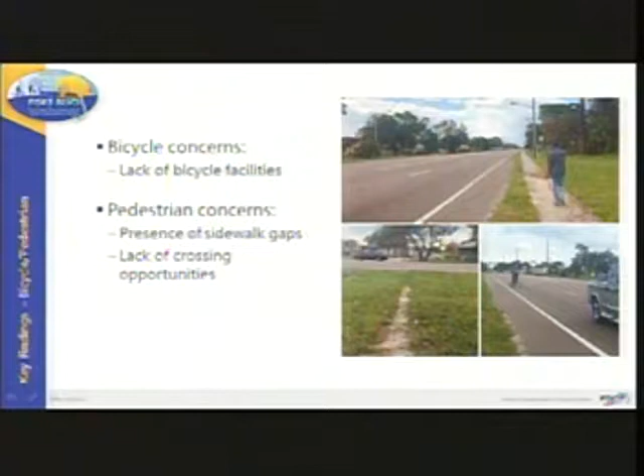There are also some locations, especially on the south side along the west side of Fiske, that have open gaps and no sidewalks at all. The 3R project will incorporate sidewalk reconstruction or construction to fill those gaps. As Georgiana mentioned, we were on the front end of this 3R project scope, and we were able to incorporate a lot of the stuff from our planning study.

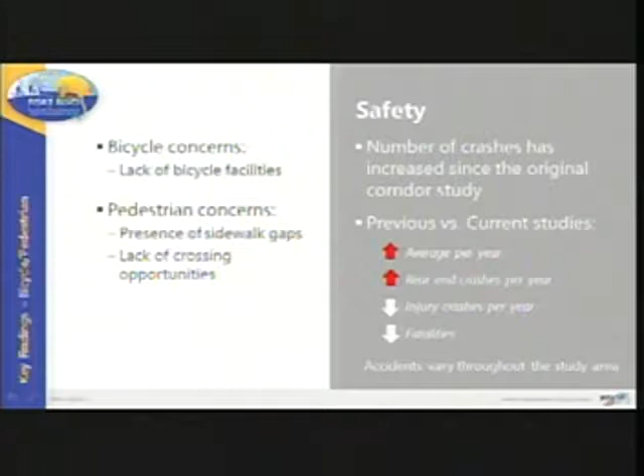Going to safety now, as I mentioned before, there was an average per year increase, also rear-end collisions. The good news is we did decrease the number of fatalities and injuries, so there was some good with the bad throughout the corridor, but this is just based on the past 2 years of recollected data.

There are 4 transit routes that go along this corridor, very consistent with Eau Gallie. There are several locations that may just have a bus sign, that's it. Or my favorite is at Barton Boulevard, they have a bench at about a 25-degree angle. I don't know who's going to sit on that bench because they're going to be very close to their neighbor and get to know them very quickly.

We're looking at trying to do ADA compliance, a 5x8 landing pad, and also trying to level that ground at a retaining wall because there is a vertical difference there, so there are some differences we're trying to address. We're also working with SCAT to figure out how to do that. There will be some ADA compliance at ramps as part of the 3R project.

So you see there's a lot of stuff we can do in a 3R project, but some things we can't, because of technicalities, costs, and so forth that the 3R project can't always accommodate, especially when you start adding too much detail.

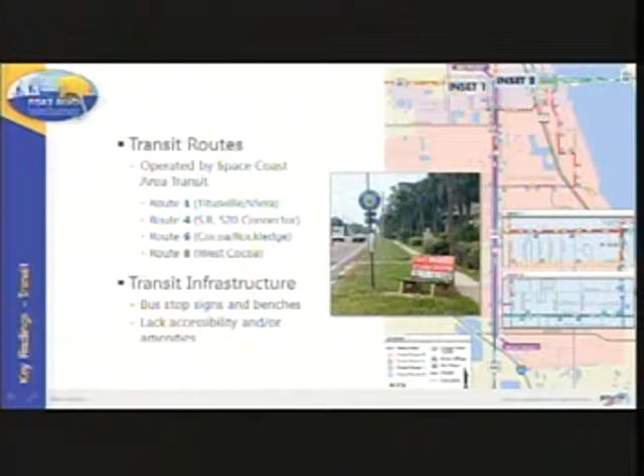This is a summary of kind of everything I've gone through. I'm going to go through some additional details.

One key item: when we started this whole process, we looked at this existing 5-lane section along the entire corridor and asked, could we add a median, or just add bike lanes only? Unfortunately, the width of the asphalt is not wide enough to add a median the entire length, because based on standards, you have to have enough room for someone to make a U-turn safely. With that width of asphalt, if they made a U-turn with a median there, they're probably doing a 5-point turn, which is not safe, especially with a 45-mile-an-hour speed limit and someone approaching.

Because of that, we didn't do a landscape median throughout the corridor, but we had spot medians that we're calling landscaped islands to give a physical barrier and hopefully slow down traffic to a certain extent.

The other side of it is we couldn't add a median specifically near Hans Christian Andersen School. There's an elementary school along this corridor, and we've been out there several times. During the pickup time frame in the afternoon, that middle turn lane becomes a queue storage lane. It backs up almost to Roy Wall, which is a long way, and there's an existing pedestrian crossing there, but people just sit and use it as a parking lot. So we definitely do not want to put a median there, because those people get moved into the actual travel lane. We tried avoiding any medians in that way to accommodate Hans Christian Andersen.

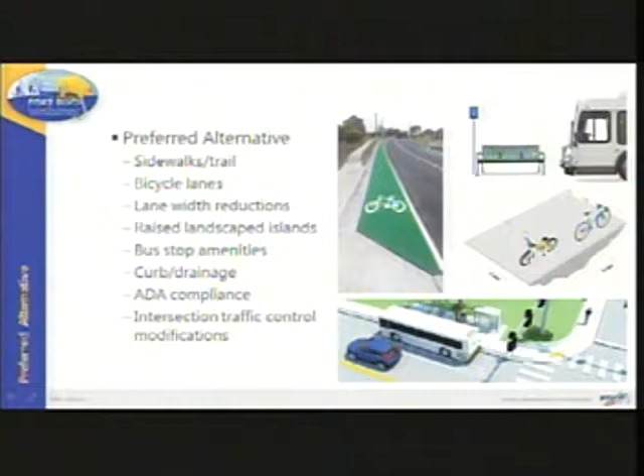The one thing I also want to note is we did have a public meeting. Gallie's a little ahead of us; we had our public meeting right before July 4th. We had about 120 people there, which was a good turnout. We did have some teachers from Hans Christian Andersen there supporting us and giving more detail on how to accommodate the students in the area, especially since a great majority of them bike and walk. Luckily, there is a good wide sidewalk currently in some areas.

Trying to accommodate that 10-foot is going to be hard, but we're going to look at that as part of long term. In addition, when you look at the FDOT design manual, the way they look at it today, we look at context classification. That's how we design the roadway nowadays. When you look at this corridor, it's what's called a Class 3.

As part of that, we have to make sure all those sidewalks are wide enough to accommodate the pedestrians. The trail will be 10 feet, which is good, but it's only on one side of the roadway. What about the other side? Well, we're going to upgrade and change all those 4-foot sidewalks to 6-foot sidewalks. Now it's 5 feet - is it really worth it to reconstruct the whole sidewalk for 1 foot? In our minds, no. It could always be an option later on, but we're definitely widening the 4 to 6 to accommodate that wider sidewalk because of classification.

There's another location farther north, and you can't see in this figure, but if you're familiar with the area, there's a softball field farther to the north near 520. A lot of people cross from low-income housing over Fiske to the baseball fields. There's a WIC check location, there's also the SCAT hub. There's a lot of pedestrian activity going on there, so we're recommending to add a pedestrian refuge island there.

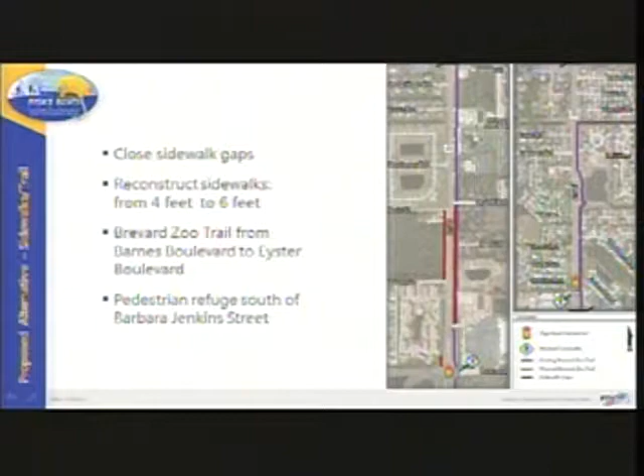Here's an example of Barbara Jenkins. You see the sidewalk on the northwest side of this aerial. We're proposing it at Barbara Jenkins because the west side of the roadway will be exit only, so you don't have to worry about people making that left-hand turn in.

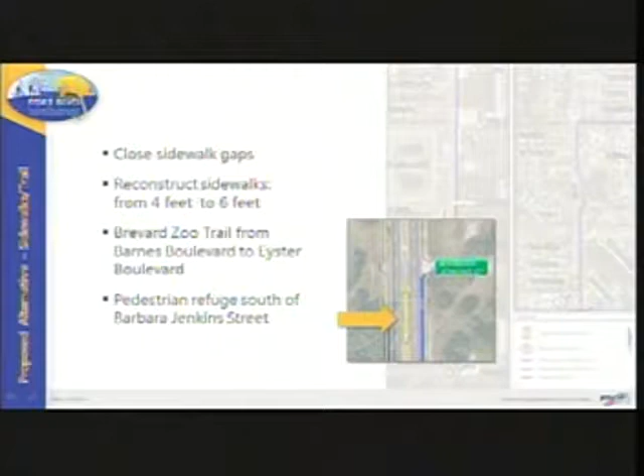Here's a quick typical. Again, like I said, the bike lane will be 6 feet. In some locations we'll go down to 5 just because of the curb, and you don't want the additional cost for curb relocation. So it's realistic that bicyclists won't realize the difference between a 6-foot and a 5-foot bike lane.

Here's Barton Boulevard. As I mentioned, we would add connectivity to the ADA accessible ramps with the boarding and alighting pad. We're recommending this throughout the corridor to make sure it's safe for all users.

Now, I do want to highlight there is one location where we actually have 2 sidewalks along Fiske today - there's that wide 7-foot sidewalk, and right next to it another 4-foot sidewalk right next to the roadway. Because you don't really want to maintain both, we're going to eliminate that 4-foot sidewalk and widen the 7 feet to 10 feet for the trail, keeping that one only, because more kids are going to be using that anyway and I don't want confusion. But if there's an ADA ramp or boarding and alighting pad, we'll make sure connectivity is available to the transit riders.

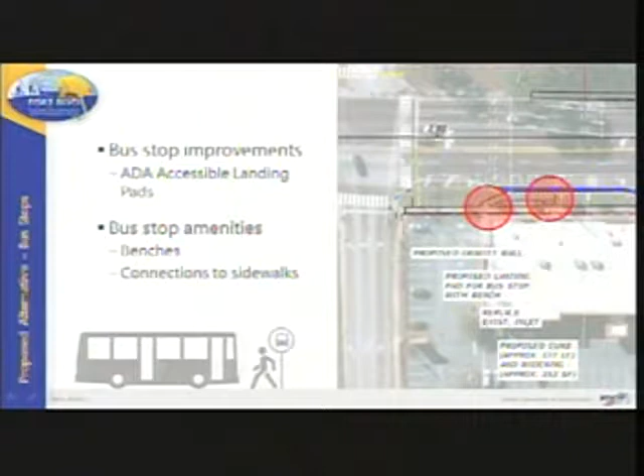So I mentioned that the southern section has open swales. The northern side is very flat - the roadway itself is very flat, it's not really an open swale. There's just a utility strip with grass and open drainage on top with an intake for the drainage.

There's a lot to know what's going on in the area. We would recommend curb and gutter with underground drainage, but again, we don't know what the answer is. So the first step is to do that survey and figure out how we can do this, because with it being so flat, you might have to reconstruct that outside lane to a pitch to allow water to flow to those drains. And again, where do we go, where do we treat it, and so forth.

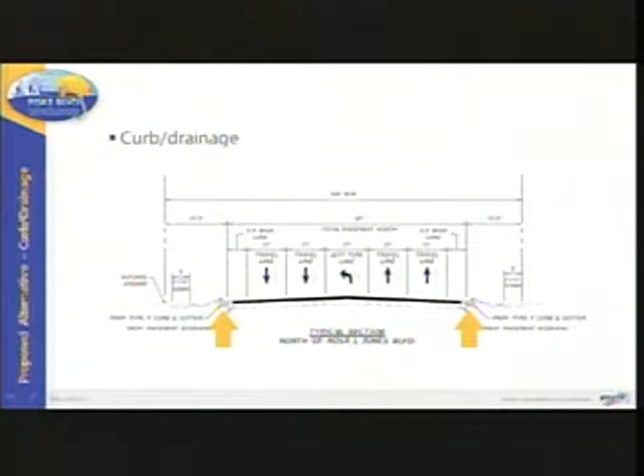So the proposed for the north section, the long-term desired list, is to add curb and gutter, but again, it's a big question mark on the cost associated with it, because it can go very high if you don't know what's going on.

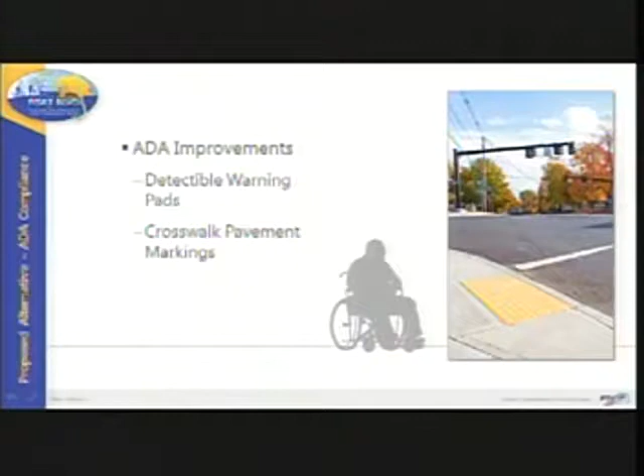Again, this is the ADA accessible improvements. This will be part of the 3R project, adding pavement marking crossings throughout the intersections. There's several signalized intersections along this corridor.

Now comes the fun part. As part of our meeting, there were 2 locations identified. Here are the 2, Roy Wall being farther south than Levitt Parkway. You can see the offsets that currently exist today, and there were locations identified by the locals as concerns.

Let's look at the history real quick. The planning study showed Levitt Parkway did not meet signal warrant. It's an 8-step process, 8 warrants to see if an intersection meets warrants to get a signal. Levitt Parkway did not meet it 2 years ago. Roy Wall was right over it. 2 years later, Roy Wall does meet it. Levitt could meet it today, tomorrow it may not. It's right on the border for the 8th hour.

So it's very close. But the way the department evaluates these now, and it's a statewide policy, is that whenever you look at an existing intersection that meets the signal warrants, you have to meet a 3-step process for roundabout analysis as a potential alternative.

First step for a roundabout is just a checklist - does it meet this, what are the impacts. You meet the next step, that's when you get into the details. Are you affecting vertical structure? Are you affecting right-of-way? What are your impacts? Does it fit? Operationally, does it help out? It's a much more detailed analysis to see if it's a viable option.

Step 3 is then, what's the benefit to cost? What's the benefit of having a signal versus a roundabout, and what is the preferred option? As part of our project and our checklist, it did meet the requirements for a roundabout, so we looked at a roundabout instead of a signal.

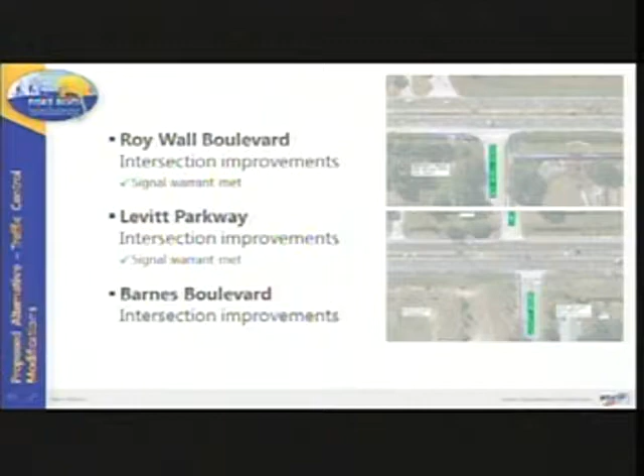So going into those two specific intersections I identified, I know when people hear the word roundabout - we have 6 studies in Brevard County - it's the same conversation that comes up: the Viera roundabout.

That's a test, right? Yeah, exactly. I've driven it multiple times. I know y'all have driven it multiple times.

We hear about it a lot. Fortunately for this public meeting, we had 120 people - I'd say it was close to a 50-50 split between people for roundabouts and against roundabouts. The against-roundabouts sentiment was all about the Viera roundabout. The department didn't do it, the TPO didn't do it. I've had numerous conversations with Bob Kamm about exactly what comments he had.

But we know that it's very large in a small area - multiple lanes, a right lane bypass, 2 lanes that circle the entire inside. There's a lot going on, so people get confused very easily. Plus you have heavy movements on Stadium and on Wickham - every leg is very heavy.

These 2 locations - roundabouts work in the right conditions with the right design. At these 2 locations, like I said, no matter if you have a signal or not, you have to realign the roadway.

Both options are not impacting any vertical structure. So you keep Roy Wall here and move the western side of the roadway, curving it up.

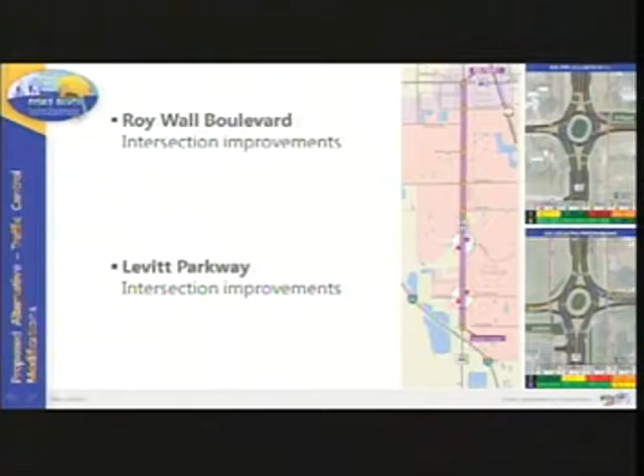But for the intent of this study, it's to evaluate it. It works. Now we're looking at the next step with traffic operations, the department looking at it in further detail.

Todd, I have a question. Sure, Mr. Price. I was at that meeting at City Hall before the 4th of July, and you said 50 of the 120 people there were for and 50 were against? Approximately, give or take, but we did receive quite a bit of good comments as well, submitted through the paper. Because my number of people against it was a lot higher than what yours was. You'll always hear those against - they're louder, you know.

Personally, I have no problem with roundabouts. I've traveled in Europe where there are a lot of roundabouts, and in the Northeast too - they're used to roundabouts and know how to use them. People in Florida, for some reason, are against roundabouts, especially in our area. What we're hearing from residents is they don't want roundabouts, and you got a letter from our city council saying they were not for these two roundabouts. I think if they're designed properly they will probably work. I think you're right, and it's just a matter of selling this to the public - and thank God this is a state road, not a city road, so you guys have to deal with that.

A couple other questions I have for you: we have a golf course on Fiske Boulevard that just celebrated its 100 years in operation this past month. I've mentioned it several times, but it's never shown up on any design about having the sidewalks in that area of the golf course at 8 feet.